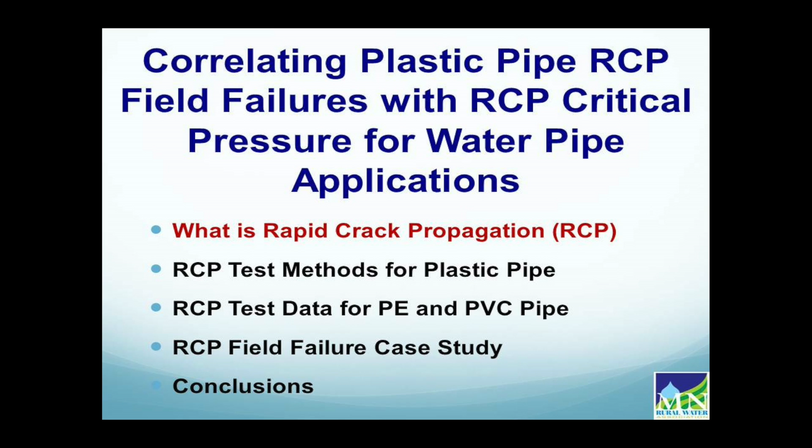In the first half of the presentation, I'm going to talk about correlating plastic pipe RCP, which stands for Rapid Crack Propagation, field failures with the calculated critical pressure for water pipe applications. First we'll talk about what rapid crack propagation is - these long-running cracks. Then we'll look at test methods used to determine resistance to rapid crack propagation, and data from these methods for polyethylene and PVC. Then we'll look at actual case studies, field failures in plastic pipe, how they compare with laboratory data, and make concluding remarks. The second part of the presentation will deal with butt fusion data.

So what is rapid crack propagation? Rapid crack propagation is a very fast fracture, 1,800 feet per second. Now how fast is 1,800 feet per second?

Imagine that you're a football star, Adrian Peterson - he's a local boy, right? We'd all like to be Adrian Peterson. Imagine you're Adrian Peterson standing on the goal line, and you run all the way to the other end of the goal line, and back, and down, and back, and down, and back, in 1 second. You can do that, right? Every day.

That's pretty fast. So when we're talking about these long-running cracks, 1,000 feet, 1,500 feet long, they actually travel that distance in less than 1 second. So it's a very, very fast fracture. It's referred to as a catastrophic failure of the pipeline, typically related with what's sometimes called an explosion.

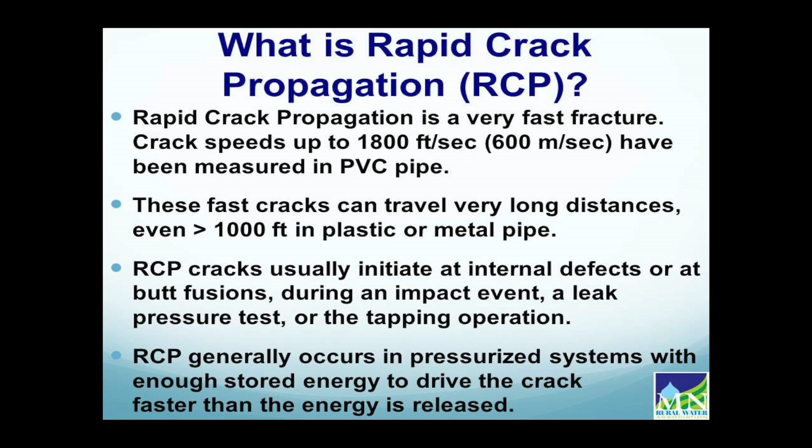These cracks usually initiate at some kind of a defect. It might be at a butt fusion, could be during an impact. Sometimes they occur during a leak pressure test. Sometimes they occur during a tapping operation. But in all cases, you have to have a pressurized system, and you have to have enough energy in the system to drive the crack faster than the energy is released.

It's important to know that RCP, or rapid crack propagation, is an engineering property of the material itself. It's different for different types of metals, different for different types of plastics, and various piping materials will behave differently in an RCP event. For some ductile materials like polyethylene, the crack is basically arrested as soon as it occurs - RCP is not very common in polyethylene because of the inherent toughness of the material. For other more brittle materials, the pipe can shatter during an RCP event, or it can travel long distances, over 1,000 feet.

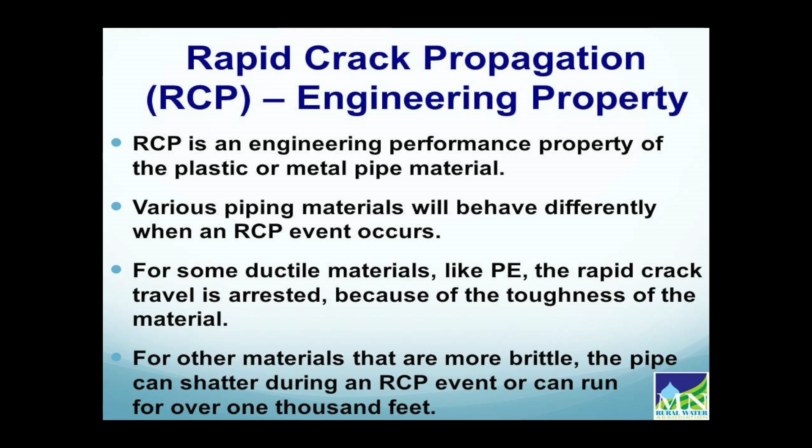Let's take a look at some of these plastics. One is polyethylene, and a number of people use polyethylene for a number of different piping applications. Polyethylene is a semi-crystalline material, well above its glass transition temperature. It's a ductile material, not a glassy or brittle material, and because of that it's very resistant to rapid crack propagation.

There have been some RCP failures - probably about 2 or 3 worldwide that have occurred over the history of polyethylene. Polyethylene has been used for well over 50 years, and there have been no RCP failures in the past 20 years in polyethylene. Its failure rate as far as RCP is concerned is very, very low.

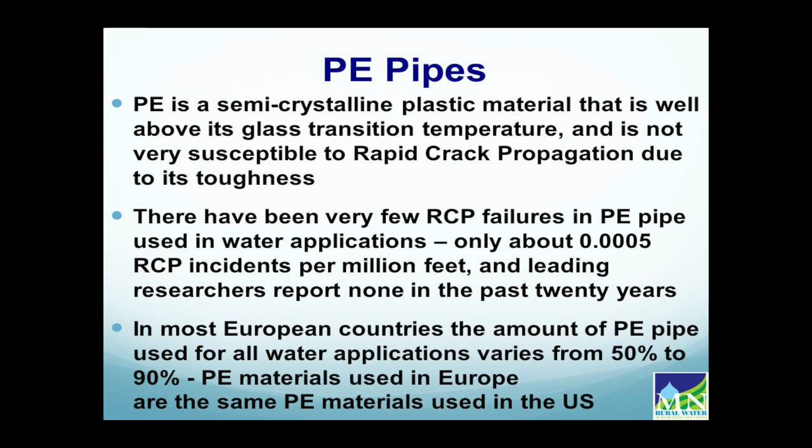In most European countries, polyethylene is used a lot more for water applications than in the United States. In typical European countries, about 50% to 90% of all the pipe used in water applications is polyethylene, the same type we use here. In the United States and also in Canada - anybody know the percentage roughly? About 3% of all the pipe used for water applications is polyethylene.

If we look at PVC pipe, PVC is a very common plastic pipe material. It's about 7 billion pounds a year, used in a variety of applications. As far as a type of plastic, it's known as an amorphous plastic, and it's below its glass transition temperature.

So it's in a glassy or brittle state. In the U.S., there have been a few RCP failures that have occurred in bell and spigot joints. When these failures occur, the crack generally travels as far as the bell and spigot joint, and then it stops. There's a discontinuity between the bell and the spigot, and that discontinuity stops or arrests the crack. Failure rate is about 0.02 failures per million feet, and as I said, they only travel a few feet and then arrest at the joint.

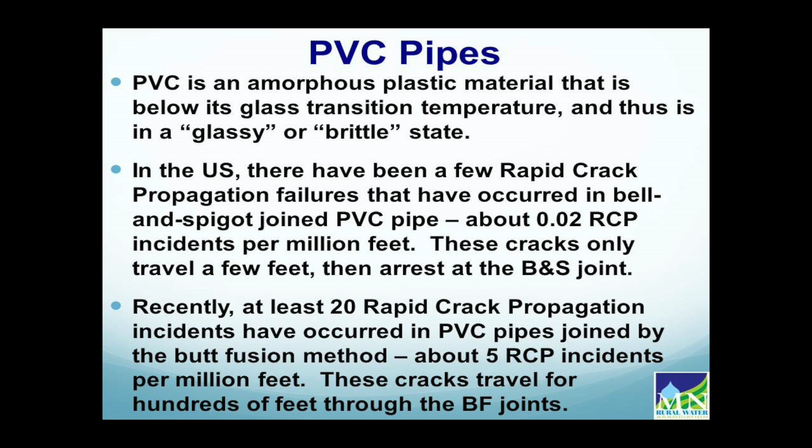Recently, at least 20 RCP failures have occurred in PVC pipe when it's joined by the butt fusion method. Now, the butt fusion method is a very good joining method, but an RCP crack will travel through a butt fusion joint. That failure rate is about 5 RCP events per 1,000,000 feet, and these cracks travel for hundreds, over 1,000 feet through the butt fusion joints, as you'll see.

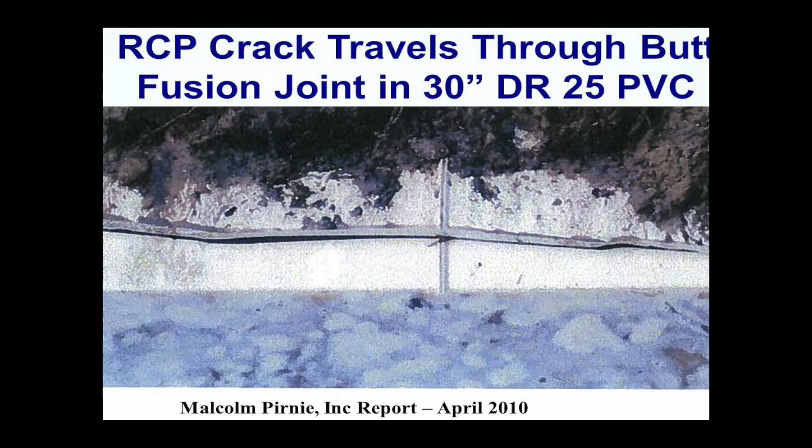These are some of the long-running cracks that have occurred in butt-fused PVC pipe. They've occurred in various parts of the country. Some of the places local to here would be in Greencastle, Indiana, Des Moines, Iowa, just south of here, in Springfield, Illinois, Green Bay, Wisconsin, just a little bit east of here. If you're a Packer fan, you obviously know where that is. There wouldn't be too many Packer fans around here, right? And in Evansville. It occurs in various pipe sizes, ranging from 8-inch to 36-inch, various DRs ranging from 18 to 32.

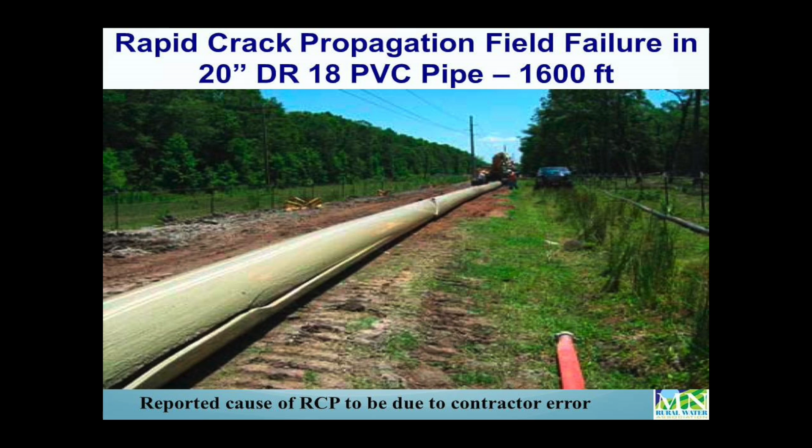And as you can see, they travel generally several hundred feet, a number of them over 1,000 feet. This one went 1,100 feet in Florida. This one went 1,600 feet, another 1,100 feet in Iowa, 1,200 feet, 900 feet. This one in California went 2,000 feet. And again, all of these were joined by the butt fusion method.

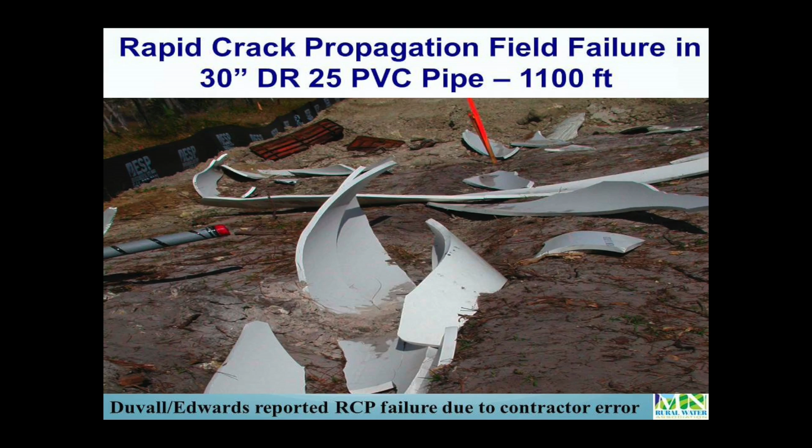This is a 30-inch DR25 PVC pipe that experienced a rapid crack propagation failure. It went 1,100 feet. 1,100 feet means the entire pipeline fractured in less than 1 second.

Yes, sir? Okay, on the bottom there it says due to contractor error. What, just the bedding of the pipe or? Something that the contractor did during the leak pressure test. Maybe they didn't use the right test cap. Maybe they didn't do something proper. So generally it's something that the contractor does incorrectly that results in the crack initiating. Once it initiates, then it propagates. Okay, but you have to have something to initiate it.

Okay. So we need to, as water engineers, we need to design against RCP. No matter what the type of material, whether it's plastic pipe or metal pipe, we need to design against RCP from occurring.

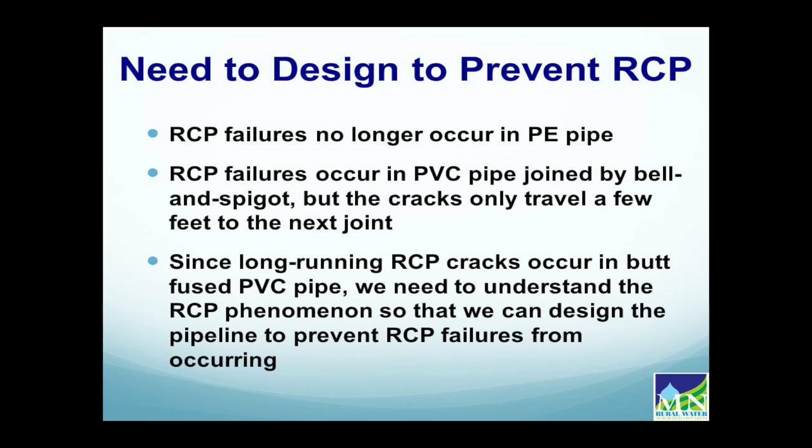RCP no longer occurs in polyethylene. It occurs in bell and spigot, but it only travels as far as the next joint, so it might go 5 feet, 10 feet, so it's not as big of an issue. It's not the entire pipeline that's being destroyed. Since long-running cracks occur in butt-fused PVC pipe, we simply need to understand this phenomenon so we can design against it. We're not saying don't use plastic pipe. We're not saying don't use PVC. We're not saying don't use butt fusion. We just need to learn how to design to prevent it from occurring.

So let's look at some of the test methods that are used to determine resistance to these long-running cracks, or rapid crack propagation.

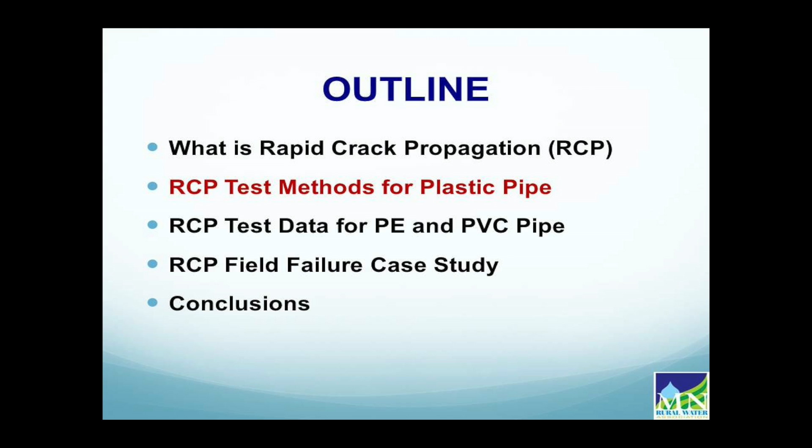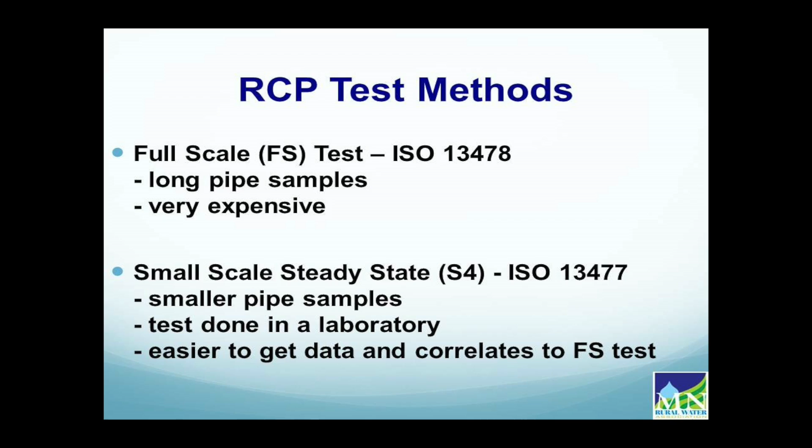A few years ago, Dr. Pat Leevers at Imperial College in the UK developed what he called the small-scale steady state, or the S4 test. Both of these are ISO tests, they're international test methods. This uses much smaller pipe samples that can be done in a laboratory, and once we get the data, it can be correlated to the full-scale test.

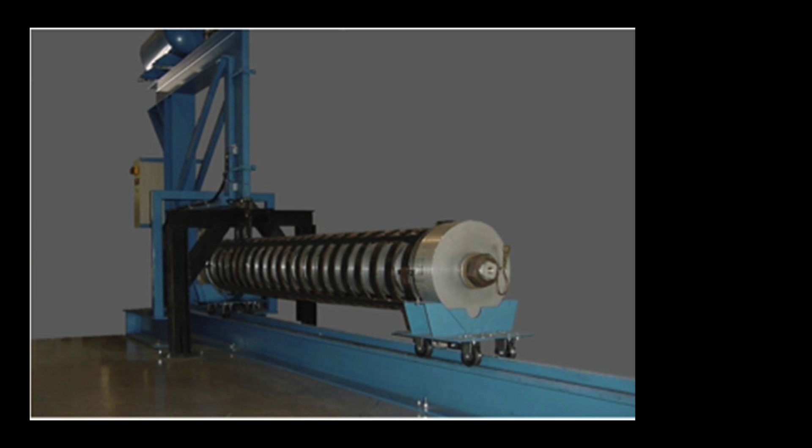This is what an S4 test looks like. This is the rig, and these are baffles that are in the middle. Because of these baffles, and it has to do with the wave speed, that's why we need to have a correlation equation to correlate the data from the S4 test with the full-scale test, which is the real answer.

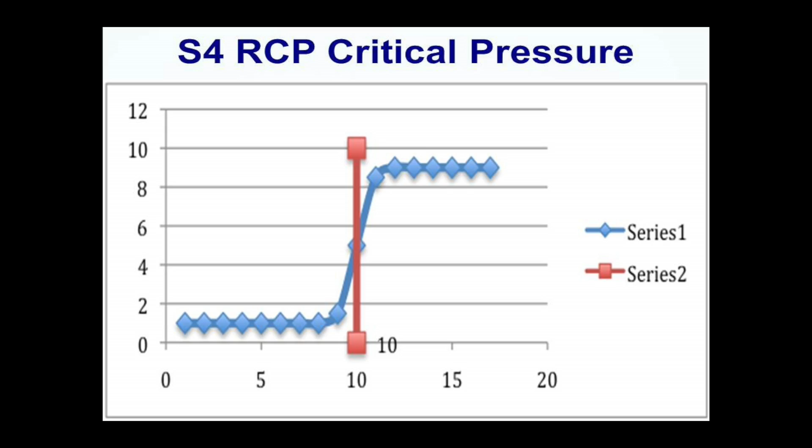The units here, if you're not familiar, these are in bar. We all know what a bar is, right? That's where we go to have libations. No, a bar is an international unit for pressure. 1 bar is 15 psig. But typically, the data are always obtained in bars when we do RCP testing.

So this is the critical pressure. From an engineering point of view, it's important to know what the critical pressure is. Why? Well, if we're above the critical pressure, if the pressure is higher than the critical pressure, it's possible for RCP to occur. If we're at pressures below the critical pressure, RCP will not occur. So from an engineering point of view, from a design point of view, we want to be below the critical pressure.

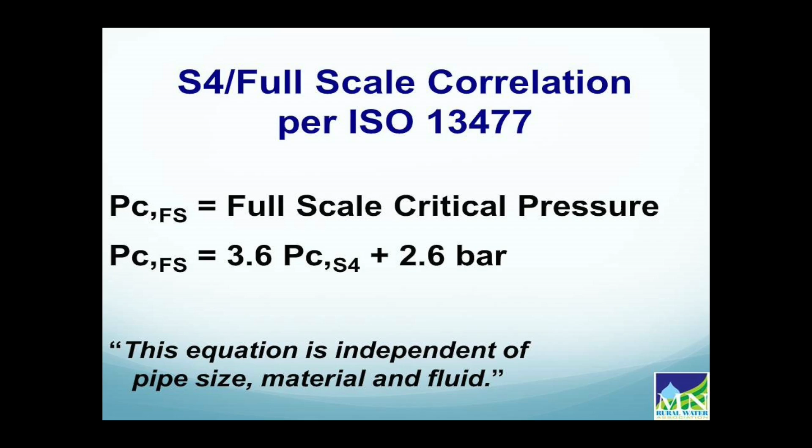Okay, so let's take a look at the S4 test and how does that correlate with the full-scale test. This term here, P sub C, is the critical pressure, and Fs stands for full scale. So P sub C, Fs stands for the full-scale critical pressure. That is equal to whatever critical pressure we obtain in the S4 test, multiplied by 3.6, plus 2.6 bar. That is how we get to the full-scale pressure from the S4 critical pressure. And this equation is independent of pipe size. We can use it on various pipe sizes, various materials, and with various fluids like water, air, etc.

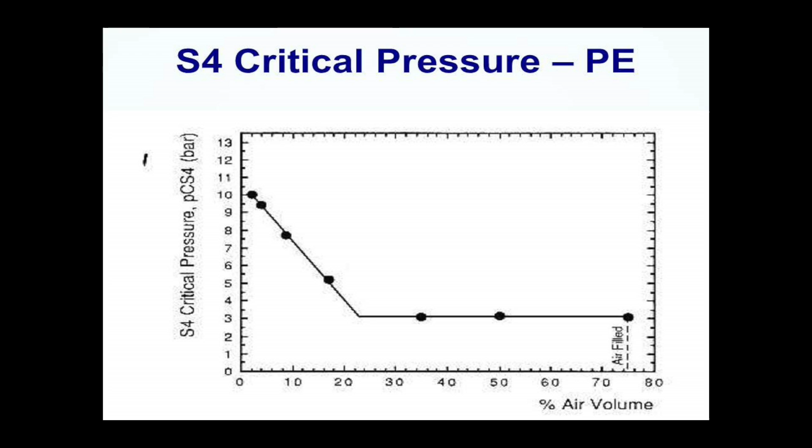This is important because what it means is that we can do the test in 100% air, and it's the same critical pressure as a situation where we have 20% air and 80% water, which is a situation where you might have entrapped air. We know that you're not supposed to have air in your water, but there are cases where there is entrapped air, and many times in these failures that have occurred, it has been reported that there is entrapped air in the water, and that helped to cause the long-running crack.

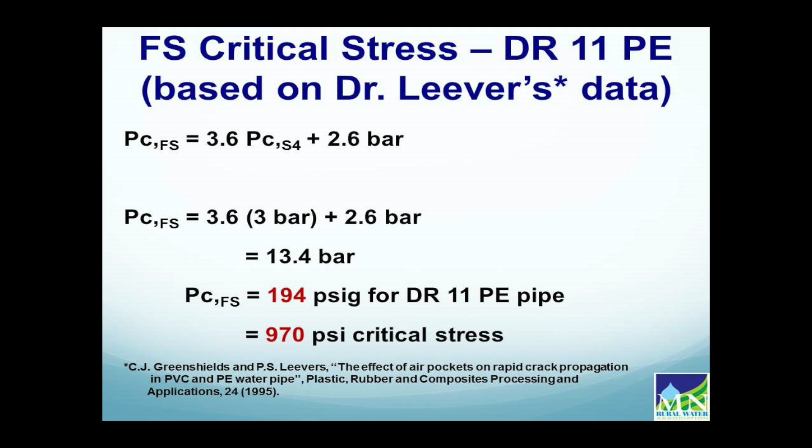So this is the critical pressure that we'll use, in this case 3 bar. This is the correlation equation that we talked about. The full-scale critical pressure is 3.6 times 3 bar plus 2.6, which is 13 bar. Multiplying that by 15, we get to about 195 psig. That's the critical pressure for this DR11 polyethylene pipe.

So, what do we do with that? Now we decide how does that compare to the actual operating pressure, or the pressure rating. The pressure rating is actually obtained 2 ways. One is the standard pressure rating equation. That's the equation you'll see in the ASTM standards, the AWWA standards, based on the HDB, or hydrostatic design basis. The other way to determine the pressure rating is to base it on the critical pressure, and to make sure that the critical pressure is greater than 1.5 times the pressure rating.

Why 1.5 times? Because typically that's where you do your leak test. That's the pressure for your leak testing, 1.5 times your pressure rating, or sometimes 1.5 times your operating pressure. So we're going to look at the pressure rating obtained by the pressure rating equation and by the critical pressure.

Taking a look at this example, this was DR11 polyethylene that was tested. According to the pressure equation, it would have a pressure rating of 125 psig. Looking at its full-scale critical pressure and dividing by 1.5, it would have a pressure rating of 130. We used the lower of the 2 values to be more conservative. In this case, the standard pressure rating from the HDB is lower, so that would be the pressure rating for the pipe.

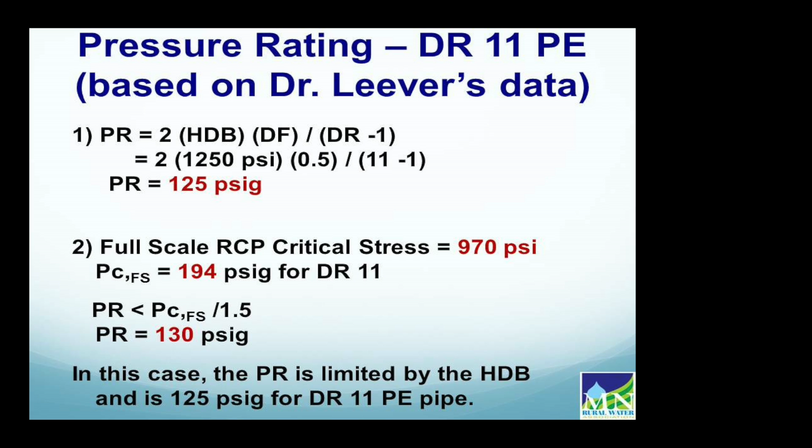So the safety factor on that pipe is a 2.0, is that what you're saying? I'm not sure what you mean by the term safety factor. The standard safety factor on pipes is designed as 2.0. You're talking about a design factor of 0.5. For example, the previous example had a 0.5 design factor. You could call that a safety factor then of 2.0. Is that what you mean?

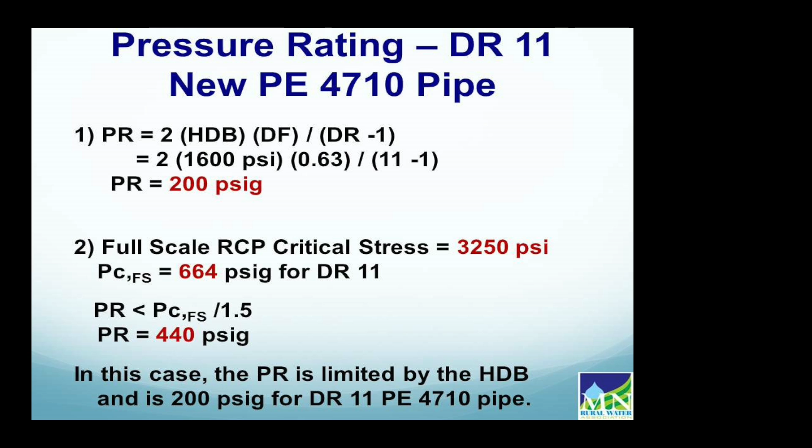Sure, okay, yes. This is a design factor of 0.63, so it would be a safety factor of about 1.7, whatever it turns out to be. Right, right, okay. And this was done with these PE materials simply because of the much higher resistance to slow crack growth, which is how these materials fail in service. So that's what justifies the higher design factor.

Actually, this design factor of using 0.63, if you want to call it a safety factor, ends up with a pressure rating of 200 psig. But this is still conservative. If we look at the ISO method of pressure rating and their safety factor, DR11 would be operated at 232 psig. So even with the new higher design factor, we're still conservative as to what I would call the pressure capability of the pipe. And this material is used internationally with this kind of a pressure rating.

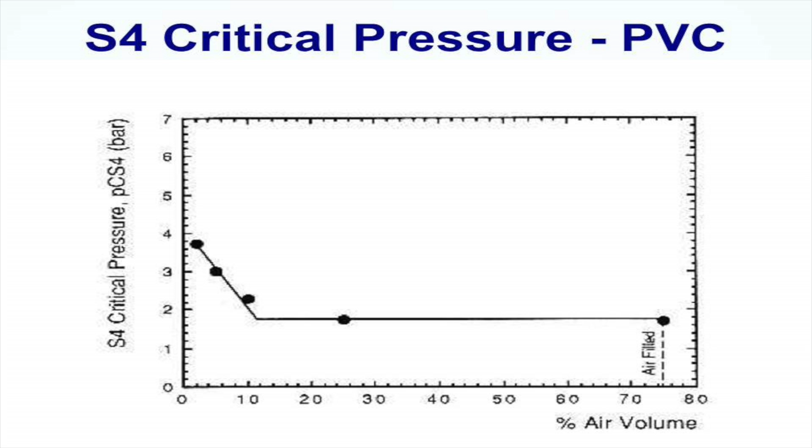And that critical pressure is 1.6 bar. Now, if we take that exact same equation and plug in 1.6 bar for this DR19 PVC pipe, we get a critical pressure of 121 psig, or a critical stress of 1100 psi.

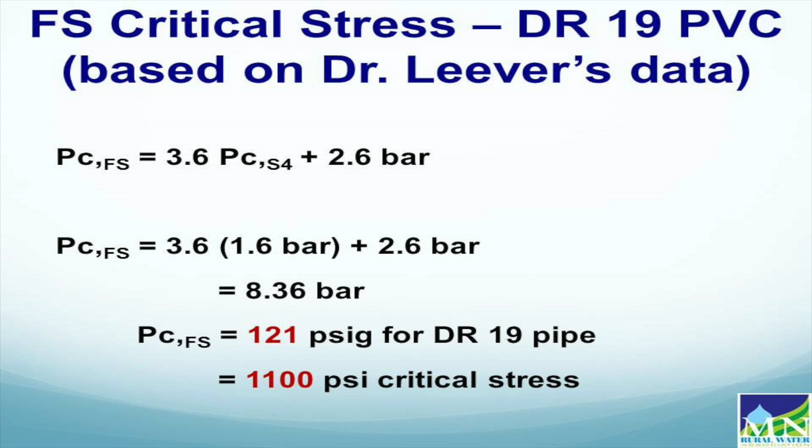If we look at the pressure rating equation, it's 4,000 psi, the design factor of 0.5, or safety factor if you will, of 2 to 1. That pressure rating is 222 psig. With the full-scale critical pressure of 121 psig, dividing it by 1.5, that indicates a pressure rating of 80 psig. So if we're going to design against RCP from occurring, the pressure rating would have to be decreased from 222 down to 80 psig.

That critical pressure we just calculated is based on laboratory data and an empirical correlation equation. How does that correlate with actual field performance, actual field data? Well, let's take a look, and we'll do that by looking at an actual case study.

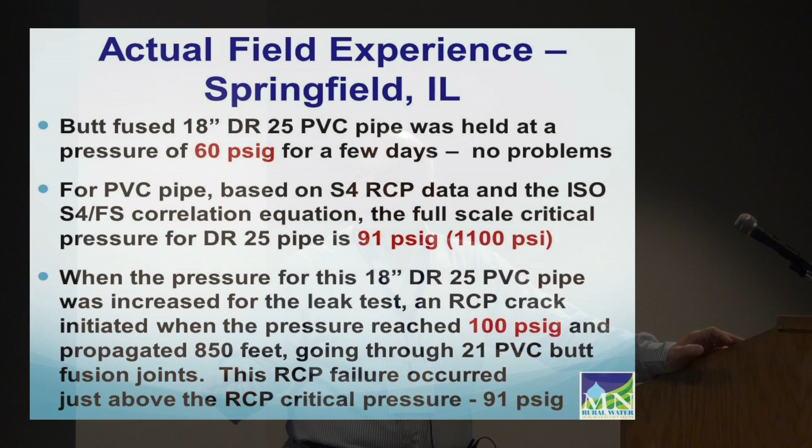The case study we'll look at is some actual field experience a little bit south of here in Springfield, Illinois. They used butt-fused 18-inch DR25 PVC pipe and held it at a pressure of 60 psig for a few days. They had no problems.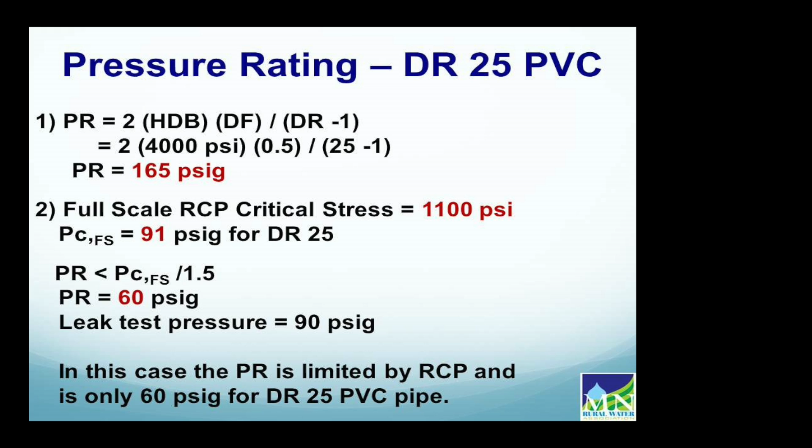Recall that for PVC pipe, based on Dr. Leevers' S4 critical pressure data and the ISO correlation equation, the full-scale critical pressure for DR25 pipe would be 91 psig. That's based on the stress. Once we know the stress, we can determine the pressure for any DR, dimension ratio. So what the equation says is the critical pressure is 91 psig.

That means if the internal pressure is less than 91, RCP will not occur. If the pressure is over 91, it's possible for RCP to occur. What actually happened is that when the pressure for this 18-inch DR25 pipe was increased for the leak pressure test, a crack initiated when the pressure reached 100 psig, and it propagated 850 feet going through 21 joints.

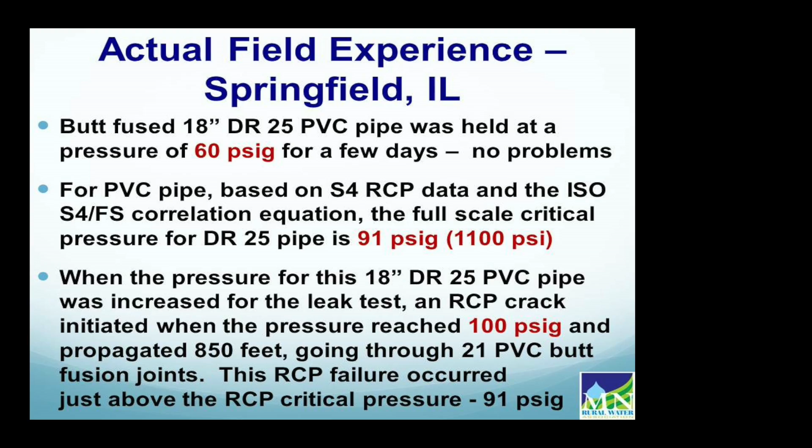This is the actual value where RCP occurred. That's called propagation, when it goes 850 feet. We know the critical pressure therefore needs to be lower than that. The calculated value is 91, so there's very good agreement between what actually happened in the field and the calculated value of 91. When it got just above 91 psig, the crack ran 850 feet.

So if we do the same analysis for this DR25 pipe, the pressure rating according to the pressure rating equation with the standard 0.5 design factor, or 2-to-1 safety factor, is a pressure rating of 165 psig. With a calculated critical pressure of 91 psig, the pressure rating would be 60 pounds — considerably lower than the pressure rating calculated from the full capability based on the HDB. But that's what the pressure rating needs to be if we're going to prevent RCP from occurring.

Okay, let's see if we can make some concluding remarks.

These are some of the failure rates we discussed with the PE 4710 materials, based on the critical pressure that's been determined at 3 times the pressure rating. RCP will never occur in a PE 4710 material. For the earlier generation polyethylenes, we estimate the failure rate is about 0.0005, a very low failure rate. For PVC joined by bell and spigot, it's a little higher, 0.02 failures per million feet.

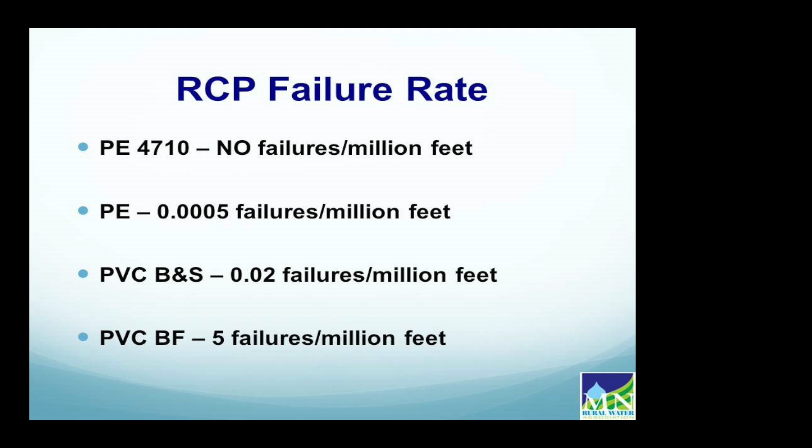So this summarizes what we learned about the pressure rating, and the pressure rating really limited by the full-scale pressure rating by the HDB. For the DR19 pipe that Dr. Leevers examined, the full-scale critical pressure is 121. That means the leak test pressure should be less than that, let's say 120. If the leak test pressure is 120, then the pressure rating is 80 — considerably less than the pressure rating calculated by the HDB.

For DR25 pipe, the calculated full-scale critical pressure is 91. That should be greater than the leak test pressure. So if we limit the leak test pressure to 90, the pressure rating is 60, again considerably less than the pressure rating calculated by the HDB.

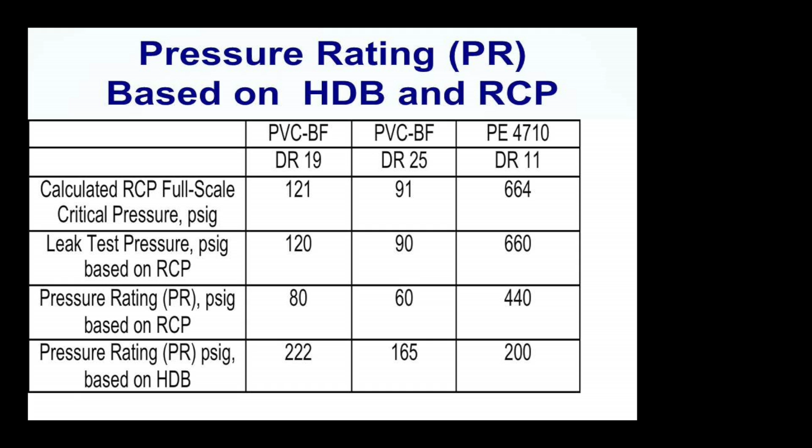In the case of polyethylene, the critical pressure is 664. We don't leak test pressure this high, but it could have a leak test pressure as high as 660. With a pressure rating of 200 psig, the actual pressure test is 300 psig — that's where 200-pound polyethylene would be leak pressure tested. But again, the actual pressure rating and the leak test pressure is considerably lower than the critical pressure.

So how do we prevent rapid crack propagation in polyethylene? The best way to design against RCP occurrence in PE is to select a material that has very high resistance. Most polyethylene materials do have very high resistance to RCP. The critical pressure is generally higher than 1.5 times the leak test pressure. As long as your critical pressure is higher than 1.5 times the leak test pressure, RCP will not occur. With the 4710 materials, it's so high it will never occur.

How do we prevent rapid crack propagation in butt-fused PVC pipe? The critical pressure for butt-fused PVC pipe is only half of its pressure rating based on the HDB calculation. This is why there have been so many RCP failures. I had a table earlier showing you about 20 of them — that's just the ones I'm currently aware of.

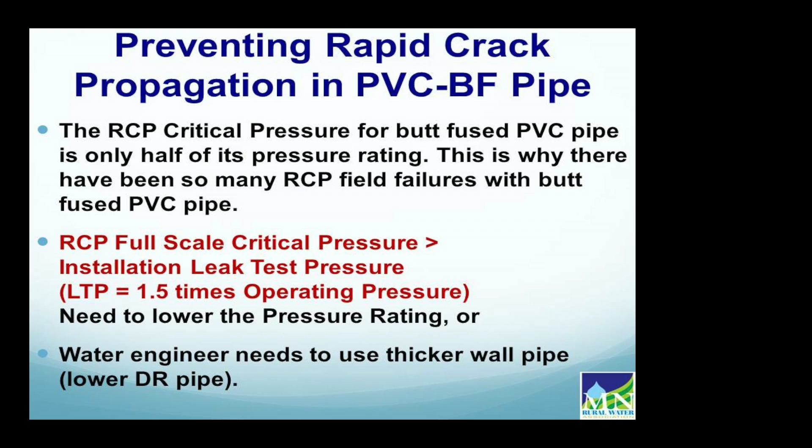The key point is that the full-scale critical pressure needs to be greater than the leak test pressure, which is 1.5 times the operating pressure. If it's not, then we need to lower the pressure rating as a way of preventing RCP. Another way would be, if you need higher pressure than what that calculates to, you need to use a thicker wall pipe or a lower DR number.

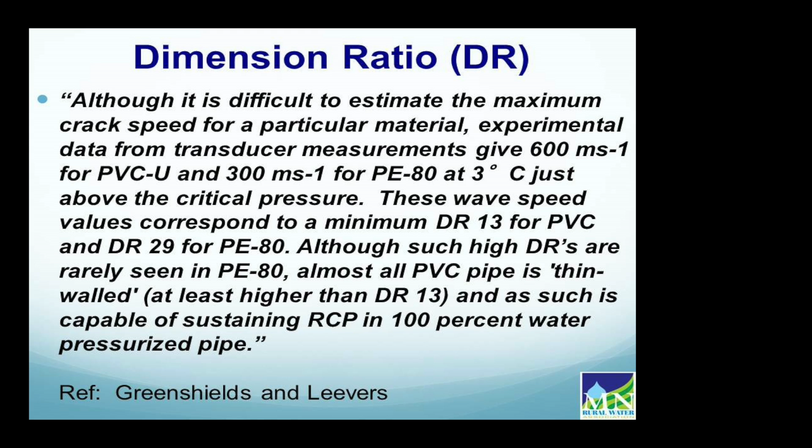So if you're using DR25, you might need to use DR18 or DR11 or whatever. Now this, using a thicker wall pipe, is exactly in agreement with Dr. Leevers' paper, where he basically states, when talking about wave speeds, the values correspond to a minimum DR13 for PVC and DR29 for PE80 — that's the type of polyethylene he tested. Although such high DRs are rarely seen in PE80, almost all PVC pipe is thin-walled, at least higher than DR13, and as such is capable of sustaining RCP, even in 100% pressurized water. So even in 100% water, it's possible to get RCP failures in PVC pipe, and that's what Dr. Leevers observed.

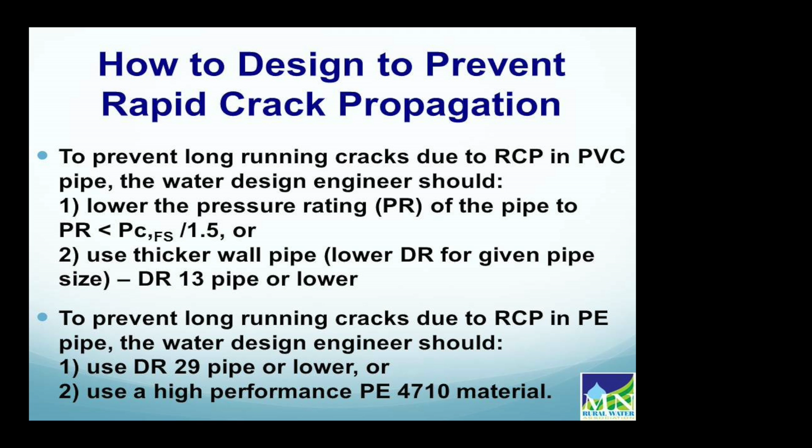So in summary, to design to prevent rapid crack propagation from occurring, to prevent these long-running cracks due to RCP in PVC pipe, the water design engineer should lower the pressure rating of the pipe such that the pressure rating is less than the full-scale critical pressure divided by 1.5, or use a thicker wall pipe, DR13 or lower. To prevent long-running cracks due to RCP in polyethylene pipe, the water design engineer should use DR29 pipe or lower, or use a PE4710 material, and it'll never occur.

Okay, let's now, we'll do it on time.

Let's now take a look at some of the characteristics of butt fusion joints in plastic pipe used in water applications. We're going to look at background information, laboratory results, high-speed laboratory results, and field experience for butt fusion, and compare the two.

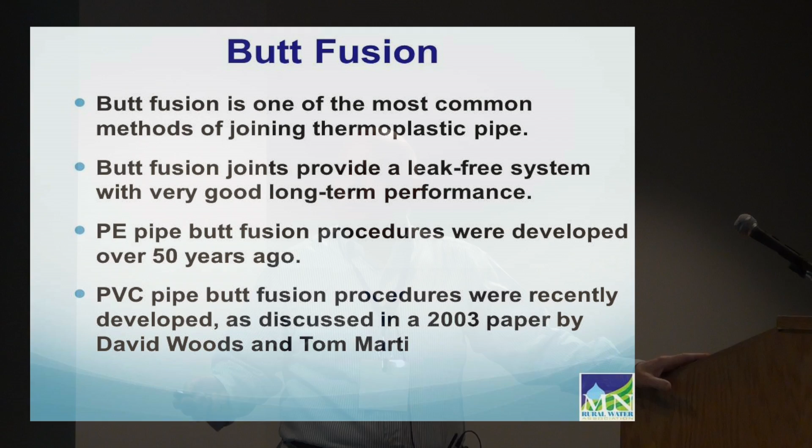Let's start first with butt fusion in general. Butt fusion is one of the most common methods of joining thermoplastic pipe. It's used in polyethylene, now in PVC, used for polyamide, used for a number of the fluoropolymers—so a number of thermoplastic materials are joined by this butt fusion method. Butt fusions are used because they provide a leak-free system. For example, in the gas industry, it's very common around the world to use butt fusion, because it's a very good joining method, and obviously in a gas system you want a leak-free system.

That's why butt fusion joints are very commonly used in the gas system, and also commonly used in the water system. Butt fusion procedures were developed for polyethylene well over 50 years ago, so there's a lot of experience in butt fusion joining for polyethylene. PVC butt fusion procedures were recently developed, as discussed in a 2003 paper by Mr. David Woods and Mr. Tom Marti. This is when they first developed the butt fusion joining procedure for PVC pipe, which I thought was a very novel idea.

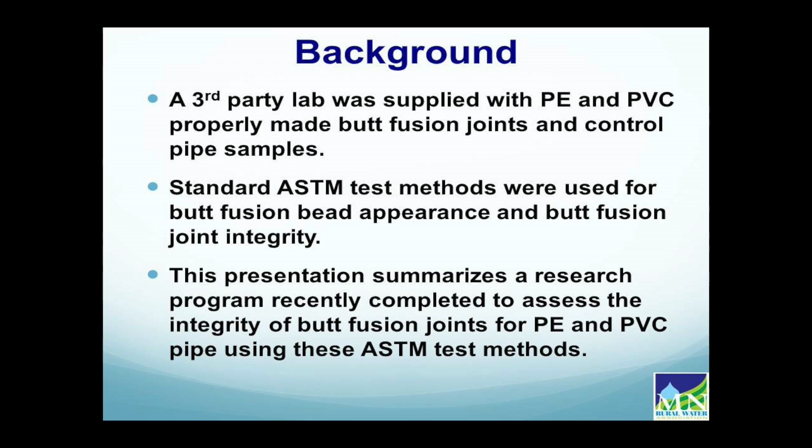In our research study, a third-party laboratory was supplied with polyethylene and PVC properly made butt fusion joints and the corresponding control pipe samples. It's always important when looking at joint integrity to take the joint and compare it to the parent material. We looked at standard ASTM test methods, looked at the bead appearance, and used these test methods to determine the integrity of the joint. Now we're going to summarize the program that was just completed to assess the butt fusion integrity for polyethylene and PVC butt fusion joints using these test methods.

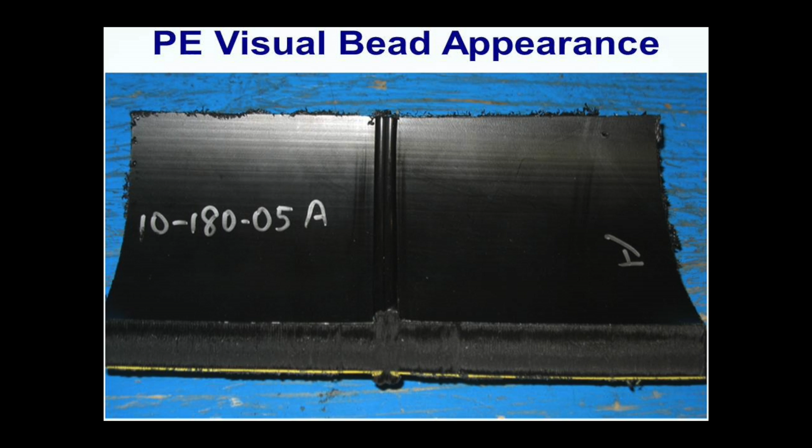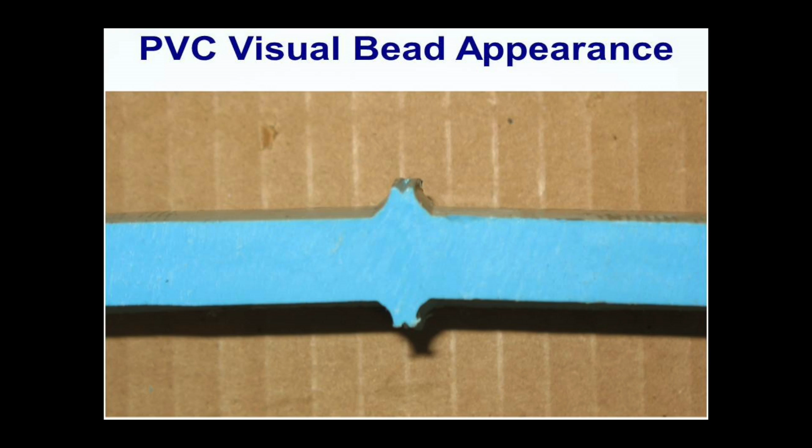These are the results of the standard laboratory tests used in this program. Just to give you an idea, this is polyethylene, and this is what a typical butt fusion bead looks like in polyethylene. This is what the butt fusion bead looks like in PVC. So that gives you an idea of what the beads look like in polyethylene and in PVC.

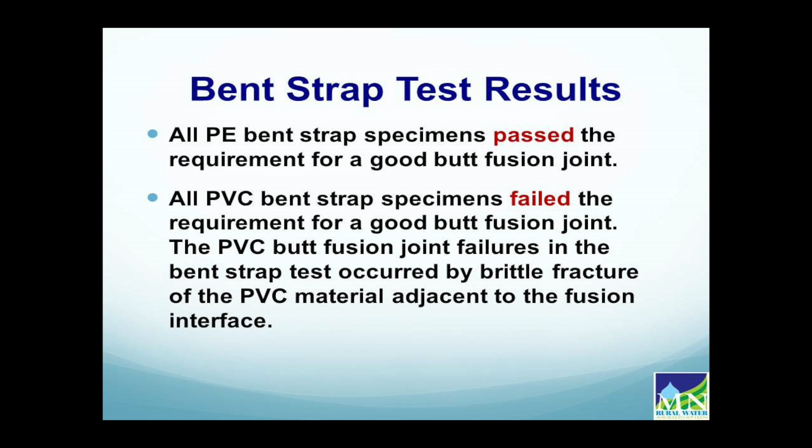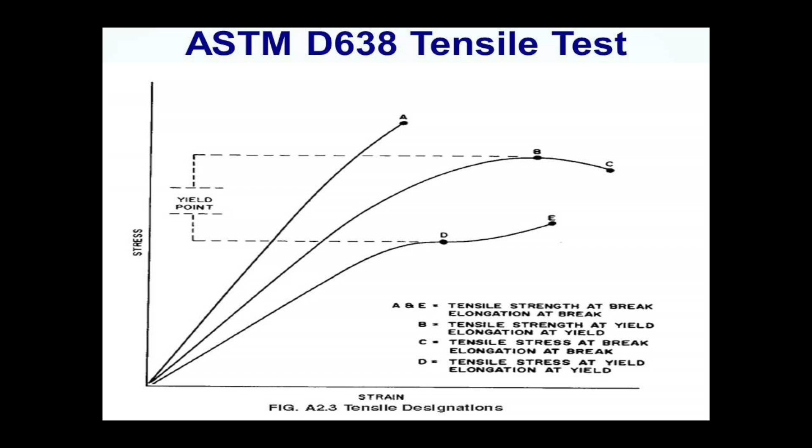This is what's known as the yield point in the stress-strain curve. This is the tensile strength at yield, and this is the elongation at yield. This is where the sample breaks during the test, so this is the tensile strength at break, and this is the elongation at break. The area under this curve is known as the energy to break.

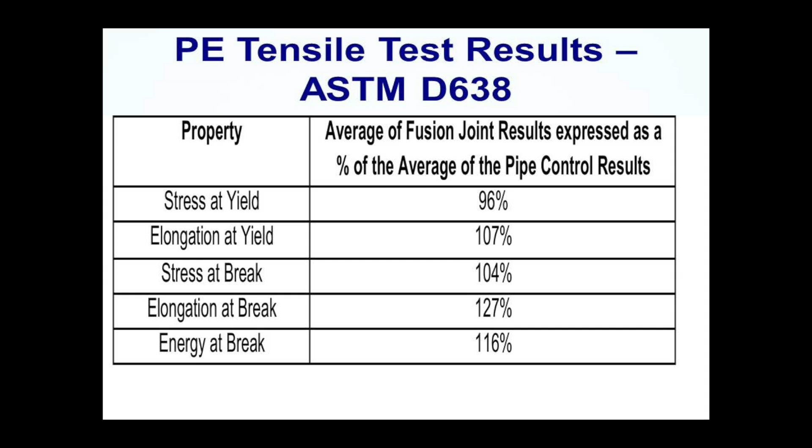So looking at the tensile test results in polyethylene, we looked at the stress at yield, the elongation at yield, the stress at break, the elongation at break, and the overall energy to break. For all of these, it's either just under or just over 100% compared to the same exact test done on the same type of specimen from the control pipe. The only difference is the butt fusion had the butt fusion in the middle; the control pipe has no butt fusion, just the same parent material.

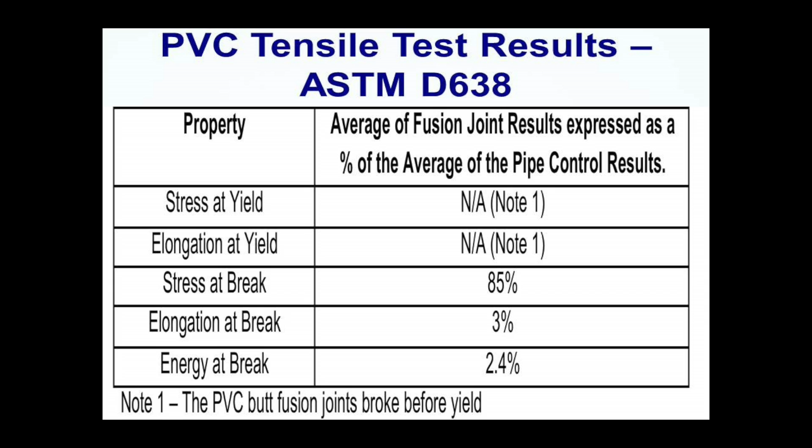These are the results of laboratory testing for PVC. The stress at break is 85%, so as far as tensile strength at break is concerned, it's fairly high. But if we look at the elongation at break, it was only 3% of the control pipe. If we look at the energy to break, the area under the curve, it was only about 2.4%. They note here that these are the values of break — they could not measure the yield values because the joints broke before obtaining the yield.

These are results of tensile impact testing. The tensile impact testing is similar, but done at a faster rate, using an anvil for impacting — so one is pulling, the other is impacting. Again, we want to look at the energy to break and compare it to control.

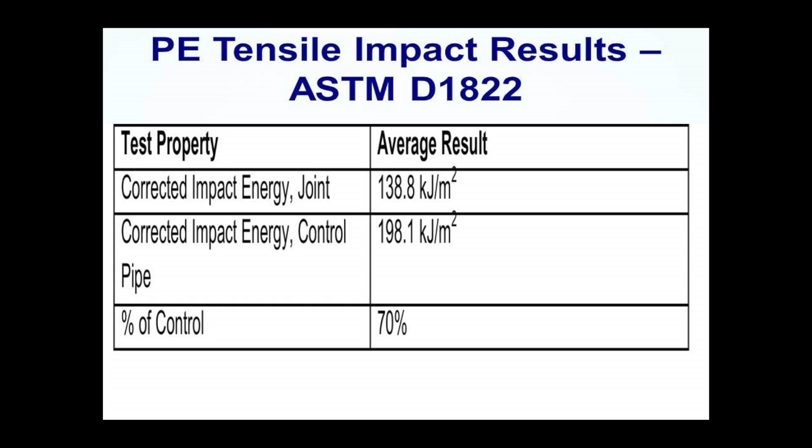These are the energy to break values for the butt fusion joint and the control pipe. In the case of polyethylene, it's 70%. This is a very common test method — in fact, probably the best test method for butt fusion joint integrity. The typical industry guideline is that 50 to 100% is a good butt fusion, 25 to 50% is a marginal fusion, and below 25% is a bad butt fusion. So 70% is a good value.

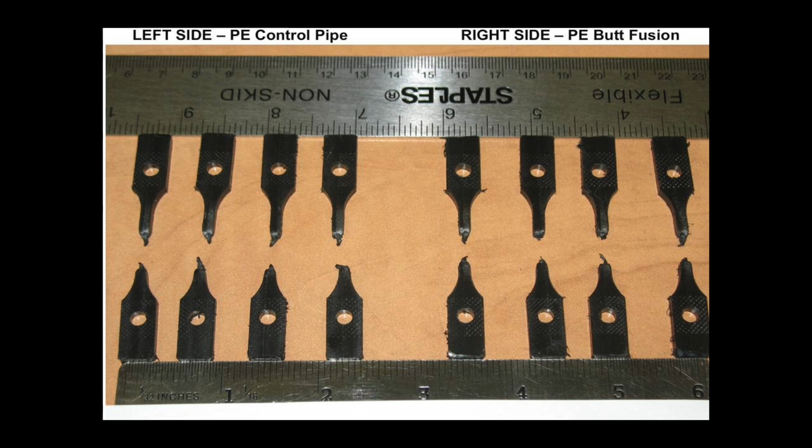These are the actual tensile impact specimens after testing, with the butt fusion on the right. You can see in every case elongation and ductile tearing, typically on just one side or the other of the butt fusion. This is an indication of a properly made butt fusion when you see this ductile elongation.

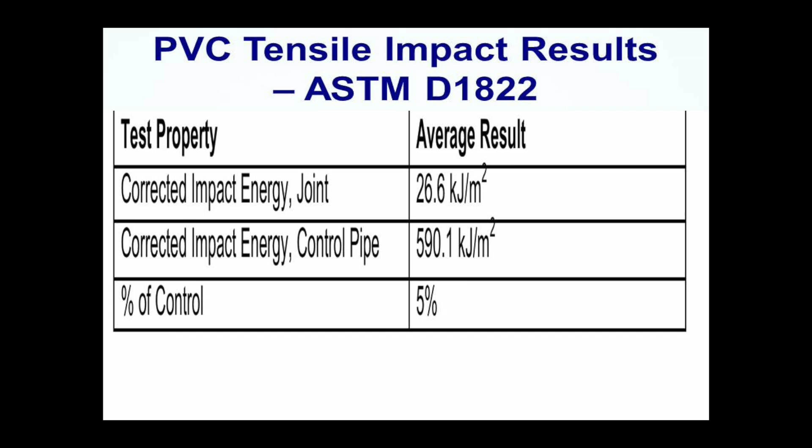What we then did was compare these results to a published report where tensile testing was done, but in this case it was high-speed tensile impact. This is a newer test method developed by McElroy Manufacturing and has been used for polyethylene for a number of years. This testing was also done by another laboratory on PVC butt fusion joints.

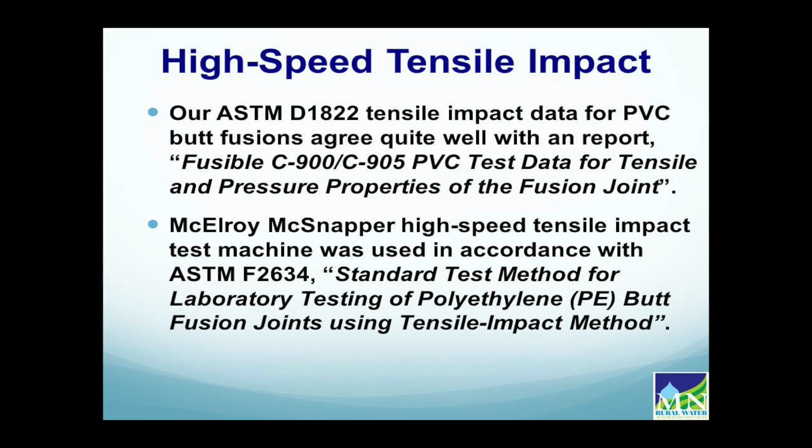Our tensile impact data for the PVC butt fusions agreed quite well with this report in the literature, fusible C900-905 PVC test data and pressure properties for a fusion joint. For this report, the laboratory used a McElroy McSnapper high-speed tensile impact test in accordance with the ASTM test method, the standard test method for laboratory testing of butt fusion joints. They used the same test method for PVC, which is perfectly fine — there's nothing wrong with that at all.

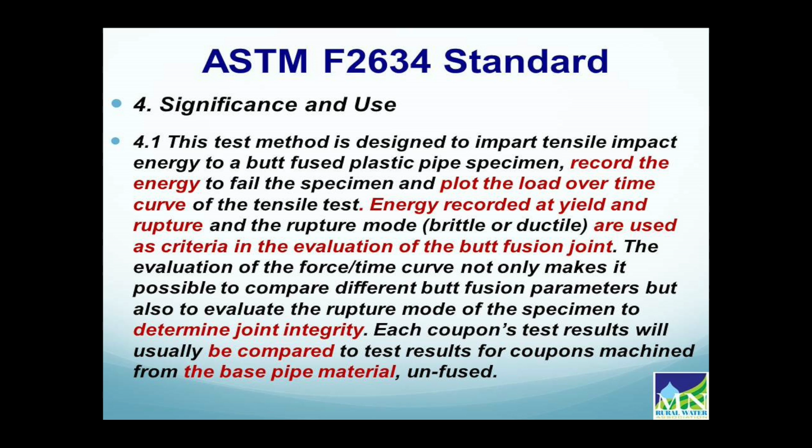This is the actual significance and use of the ASTM standard. As it says, the test method is designed to impart tensile impact energy to a butt-fused plastic pipe specimen, so it's perfectly adequate to use this test method on PVC. Key, though, is that you record the energy to fail the specimen, plot the load-over-time curve of the test specimen, and the energy recorded at yield and rupture and the mode are used as criteria in the evaluation of the butt fusion joint. So this is a very good test method, ASTM test method, to determine the integrity of a butt fusion joint.

You determine the integrity, and then you also want to compare it to the base material, as in any test method to evaluate butt fusion.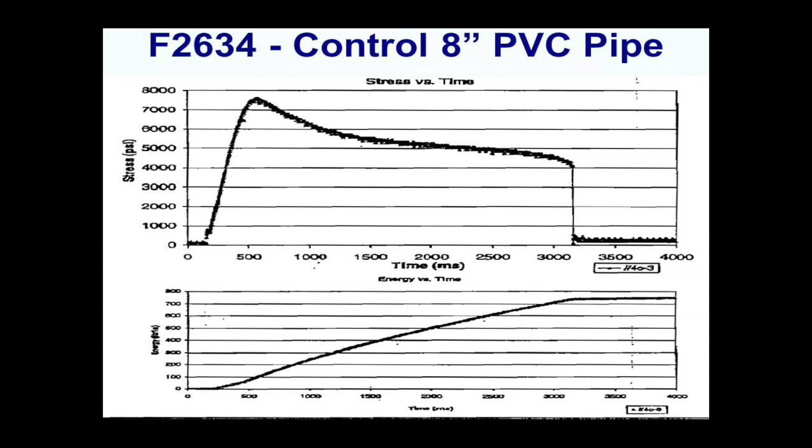The area under this curve is the energy. The McElroy-McSnapper computer program actually calculates the energy for you. It does an integration of this area, and it plots the energy for you. In the case of the control pipe, the energy is about 750.

This is a butt fusion made from that pipe. Now you can see that the stress is fairly high, so if you were to just compare the stress of the butt fusion to the stress of the control pipe, you'd say they're about the same. But if you look at the elongation, there's nothing - it's very brittle, there's no elongation. And if we look at the area under the curve to calculate the energy, it calculates about 70.

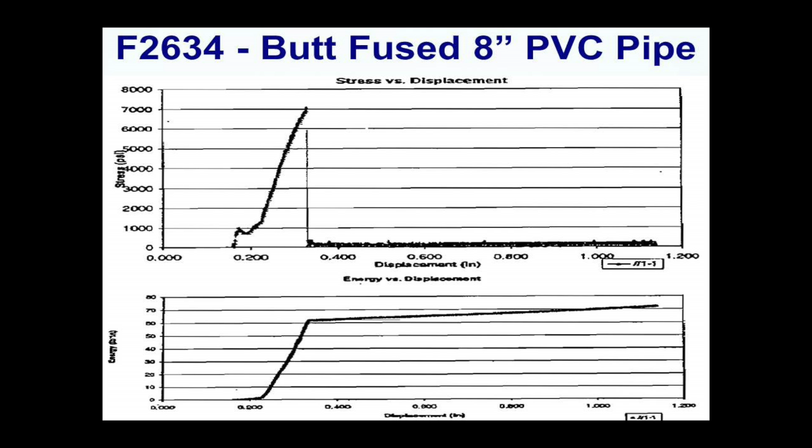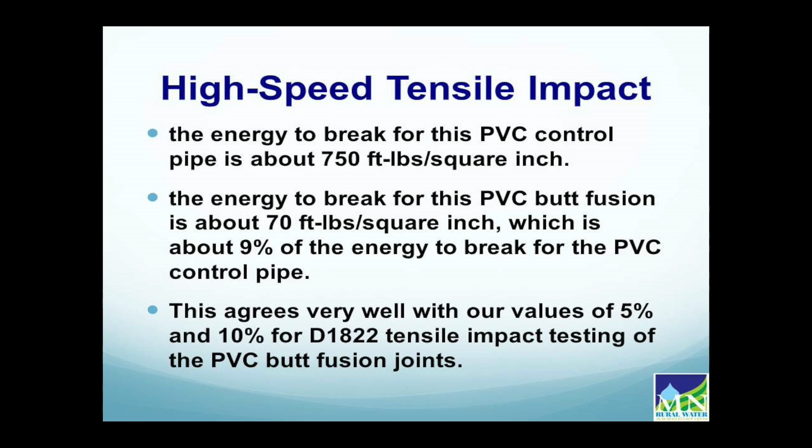The energy to break for the PVC control pipe was 750 foot-pounds per square inch. The energy to break for the butt fusion was 70. That's about 9%. And that value, using this high-speed tensile impact by another laboratory, agrees very well with our values of between 5 to 10% for the standard tensile impact test that we did on the butt fusion joints.

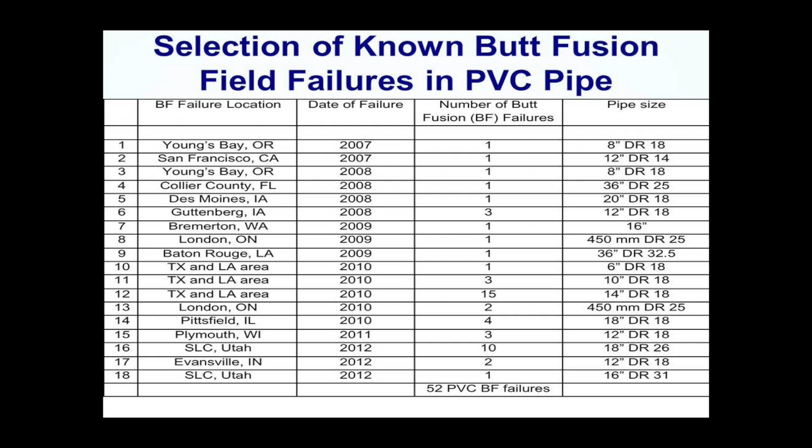Well, what is the butt fusion field experience? Again, there have been a number of field failures with butt fused PVC occurring at several different locations. Locally, we've got Des Moines, Iowa; Guttenberg, Iowa; Pittsfield, Illinois; Plymouth, Wisconsin; Evansville, Indiana. Again, a variety of sizes.

Are there joint failures? Is that what you're saying on this? These are butt fusion failures, yes. The butt fusion actually failed? Yes. Now, some of these are reported to be properly made, and they failed. I don't know, some of these may have been in service. I think some were in service, some were during the installation. But these are butt fusion failures - the actual joint failed, not the pipe. I don't have pictures of it, but I've seen them where there's actually a clean separation between the two pipes. I'd like to see that report. I believe there's a performance pipe article on their website which shows the butt fusion failures, so if you go to the performance pipe website, you'll see it right there.

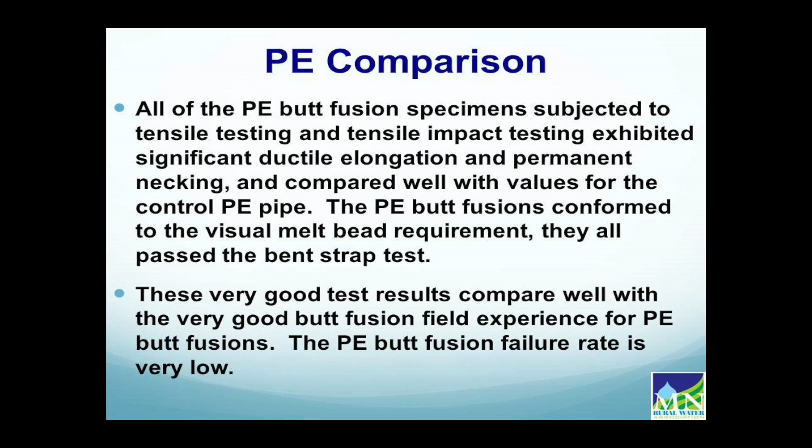So how do these field failures compare to the laboratory data? As far as polyethylene, all of the PE butt fusion specimens subjected to tensile and tensile impact testing exhibited significant ductile elongation, necking, and compared well with values for the control pipe. That's the key, comparing the butt fusion to the control pipe. The polyethylene butt fusions conform to the melt bead requirement, and they all passed the bent strap test. These are very good laboratory results, and they compare very well with the very good butt fusion field experience for polyethylene. Like I said, it's been used over 50 years, and it's used extensively in the natural gas distribution industry, where we have to have leak-free joints.

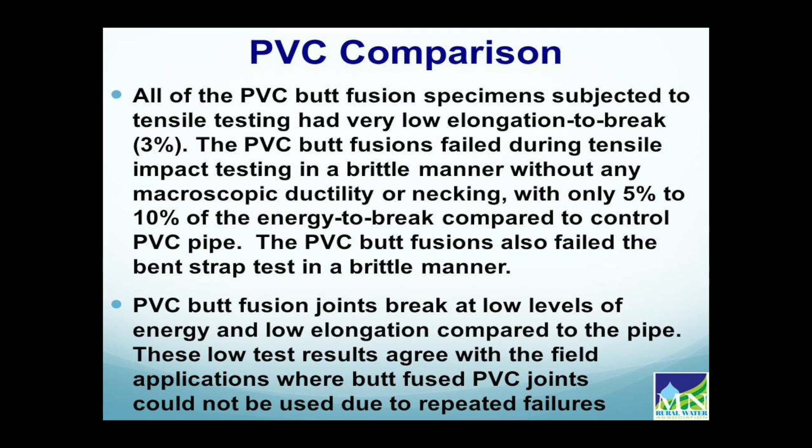In the case of PVC, all of the PVC butt fusion specimens subjected to tensile testing had a very low elongation to break, about 3% of the control pipe. In the tensile impact test, our testing showed about 5 to 10% of the energy to break compared to the control pipe, and that agreed well with the other laboratory's high-speed tensile impact value of about 9%. The PVC butt fusion joints break at low levels of energy and low elongation, and I believe that's because however these were made, there simply wasn't enough ductility to the butt fusions. These low laboratory values agree well with the field applications where there have been a number of butt fusion failures.

So in conclusion, this is a summary of the laboratory testing that was done: the bent strap test, the tensile elongation at break, the tensile impact testing, and the high-speed tensile impact testing.

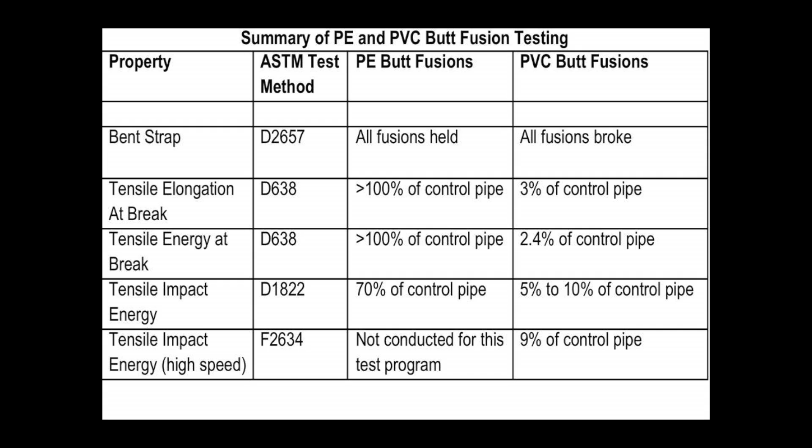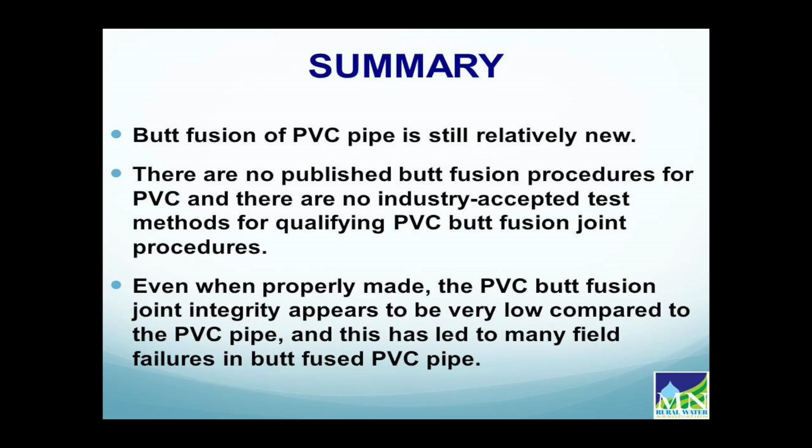In summary, butt fusion of PVC pipe is still relatively new. My own personal feeling is that butt fusion is a very good joining method, and I see no reason at all why it can't be used for PVC. I simply think we need to do a little more work fine-tuning and honing in on the butt fusion process so that it gives good joints. I think that's what we all want, is to have butt fusion joints with high integrity.

As far as I'm aware, there are no published butt fusion procedures for PVC, and no industry-accepted test methods for qualifying PVC butt fusion joining procedures. It's still relatively new, and I think as far as the industry is concerned, we need to work together to come up with ASTM or AWWA guidelines for proper procedures.

Even when properly made, PVC butt fusion joint integrity appears to be low compared to the pipe, and this has led to many field failures.

I'm a consultant for plastic pipe in general. I have polyethylene clients, PVC clients, polyamide, cross-linked polyethylene. As a consultant, I don't want to see failures occur. It gives a bad name to plastics in general, to any material that fails. You're probably familiar with the polybutylene fiasco we had in the water industry. So as a consultant, I want to see improvement in what we're doing, to make sure we have good and properly working plastic piping systems.

There's a lot of benefits to plastic pipe, and that's why it's used in so many industrial applications. It's used worldwide in gas applications, water applications, mining applications, and now in the nuclear industry. There's a lot of applications where plastic pipe is used. The predominant material is PVC. There's about 10 billion pounds a year of plastic pipe used in the United States—7 billion of that is PVC, the most popular material. About 2.5 billion is polyethylene. Those are by far the two most common types of plastic materials used in these applications.

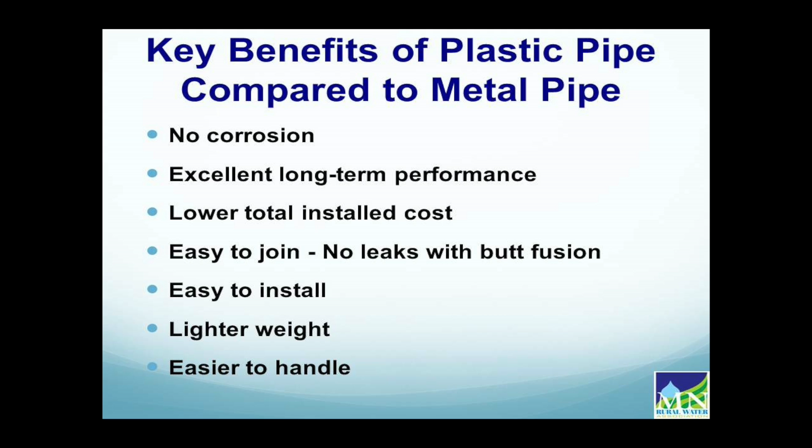Why? Well, there's no corrosion. If you were here for the previous presentation, you saw all the corrosion that occurs in metal pipe—cast iron, ductile iron, steel, etc. Corrosion does not occur in plastic pipe. Polyethylene and PVC have excellent long-term performance, lower installed costs, and they're easy to join. If the butt fusion is done properly, it will not leak. Plastics are easy to install, lighter weight, and easier to handle. So there's a lot of advantages, a lot of reasons why PVC and polyethylene are used, and they should be used.

Whether it is PVC or polyethylene, personally, as a consultant to plastic pipe, I believe the future is very bright for plastic pipe as a key piping material to replace our current failing metal piping infrastructure. Many of you have seen the grades given to our water infrastructure—D, D minus, F, whatever it is. We have a failing water infrastructure that needs to be repaired or replaced. If it's going to be replaced, I strongly urge you to consider plastic pipe, PVC or polyethylene.

With the knowledge about rapid crack propagation that I talked about today and how to avoid these long-running cracks, with the knowledge about butt fusion guidelines and how to get good butt fusions, I believe water design engineers can design their plastic water pipe systems to avoid these long-running cracks and have a safe, reliable, and cost-effective plastic piping system for their water piping needs.

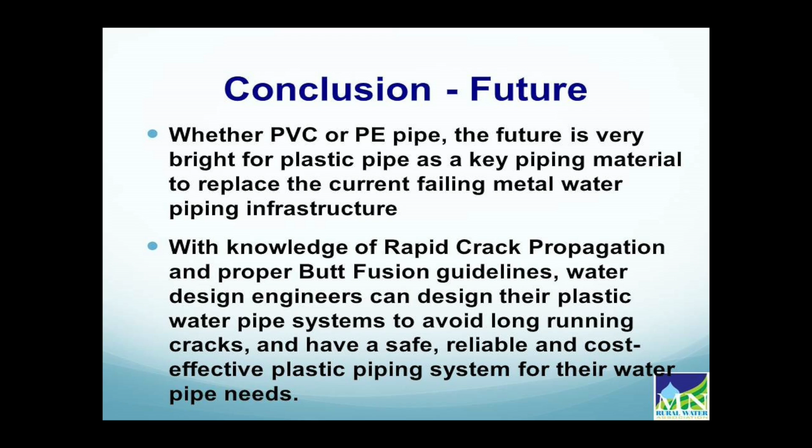With that, I thank you very much, and I'll open it up to any questions.